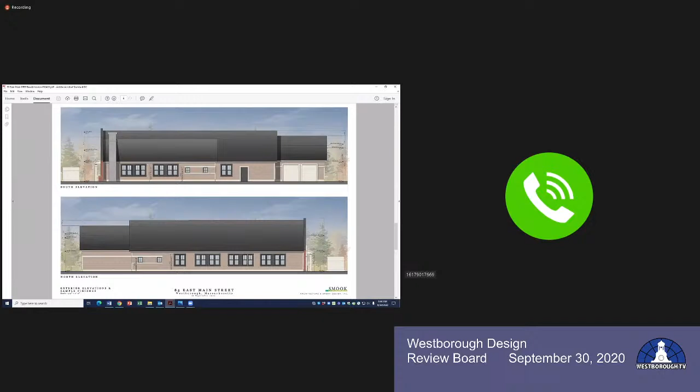And then finally, on the rear elevation, again, we've got those gabled vents that we were talking about. Lou, can you talk about what you ended up doing with that? Well, we used the trim material and painted it the trim color to make it look like what the louvers would have been. But similar to the front of the building where we didn't actually need them, we wanted to keep in line with the original design.

Right, and instead of literally tearing them out and swapping them, we've kind of created a faux louver look. One of the reasons we decided to do that in the back is, honestly, it saved some money. It looks fairly the same, let's just say that, and we felt pretty strongly in the front about doing it, but in the back we decided to do it to try to save a little money. I mean, we're talking thousands of dollars here.

To get that effect, and I think it was very successful. So, Clay, so in this elevation of the rear of the building, we're talking about those circular white vents. Is that correct, Lou? Because I don't have that image in front of me. That's right, yeah, it's the big circles in the gables. Okay, so what you're saying, are those louvered, or did you kind of take some AZEK and fake in louvers?

What's our expectation when we show up on site? It is not louvered. Okay, so it's just round and flat. Correct. And do we have that like 4-inch band of trim, if you will, around the white circle? We do, yep. In the last meeting, I think I had put up some actual pictures of them, but yes, it does have the band around it. It's a very similar look, it just doesn't have the louvered effect to it.

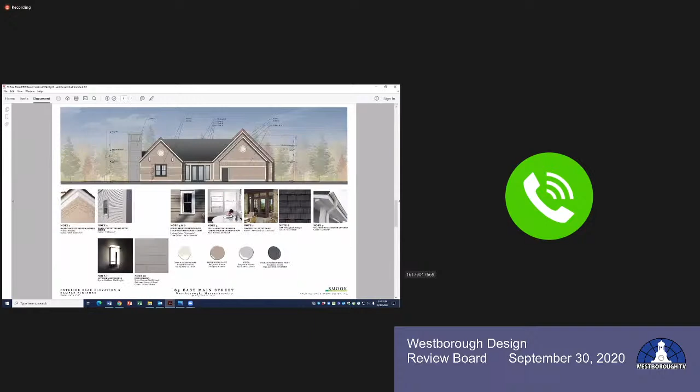So I'll speak. Go ahead. Clay and Lou, I assume that the drawings we were looking at today are dated September 2020, so all the updates you just described are in these drawings right here. And these are the drawings that Jim is going to use when he goes into the field with somebody else to give you the final sign off. So, although I can't see the notes about the louvers and stuff, I'm assuming that what you've said is what's been built and what's on these drawings, and when Jim goes to the field, assuming we approve everything, there'll be no problems. Yeah, exactly, it's noted on the drawings.

The images are correct. There's a companion document that gets stapled to that you probably have with you, a memorandum of the same date that walks you through it, sort of a supplement as a narrative. But yes, you are correct. Okay, and Hazel, does that answer your question? Yeah, except, Michael, Kristen, look at that first big picture that we have. No, it was a colored picture you had on that picture, that one is incorrect.

Lou, can you see that? Because I substituted the correct door in there on the front with a full glass door. This is the original perspective artist rendering of the building, dated November. Basically the title sheet where it's a 3D view. Yeah, we should just tear that off, because that's never going to be fixed.

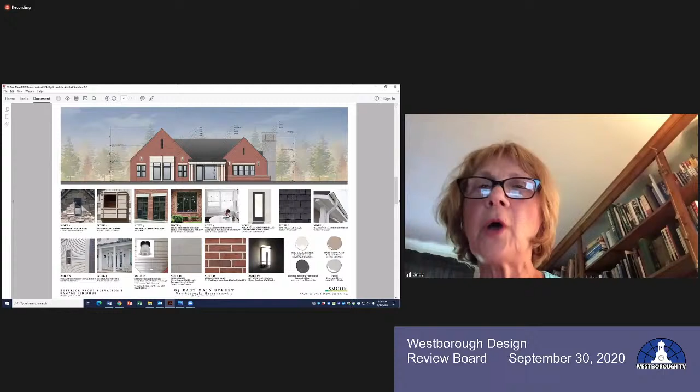I'd also like to say that on that sheet, there's a big sign in the front which I don't think we discussed with this board in terms of what signage this building will have. Yes. So that front rendering needs to be torn off, because it's architecturally inaccurate—just an early conceptual rendering that has nothing to do with reality. It just should not be there.

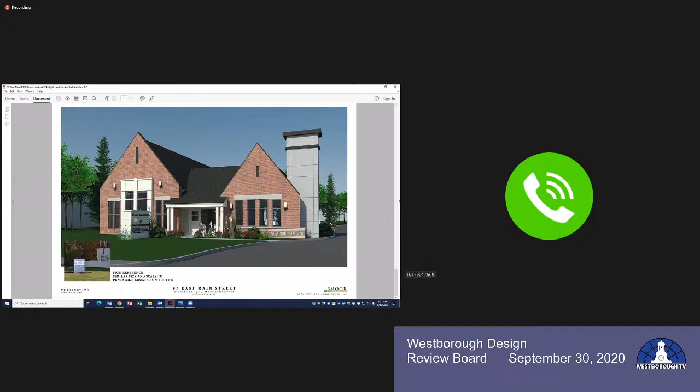I agree with you. You did not approve that. We have no intention of putting that in without approval. You're absolutely correct on that. So you'll come back to us for a sign, correct? Oh yeah, absolutely.

Okay, any other comments? No. All right, does somebody want to make a motion? I guess I'll make a motion.

I'll make a motion that we approve the modifications to the building at 85 East Main Street, per the notes made on these drawings dated September 24th, 2020. And what are we going to call these drawings? You guys have a name for these drawings? We'll just call them modifications to 85 East Main Street.

There are 1, 2, 3, 4, 5, 6—seven sheets. We're going to delete the last sheet, the perspective drawing. So we've got sheets 1 through 6, including the cover sheet, design review board.

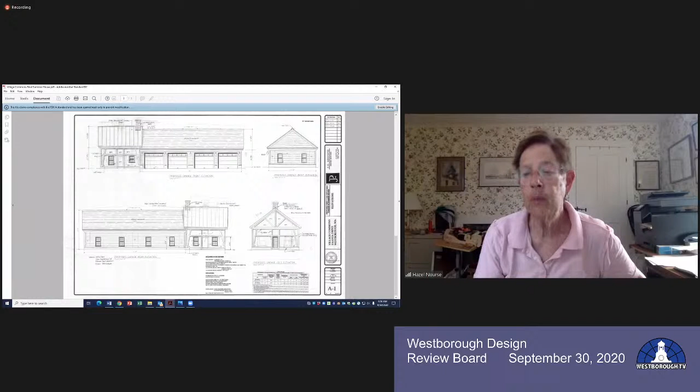Sorry, Michael, I just wanted to clarify that quickly. No worries. It appears to me the commercial building might be a faster discussion. Do we want to start with the commercial building? Sure.

Forgive me on what we approved or did not approve last time. I'm looking at the minutes from August 31st. So where we left off, we had approved the residential units, provided that when Jim did his on-site visit, it matched whatever the plans were that were provided.

So that's already approved, but we're just following up on those plans. And then we did not make part of the motion approving the commercial building plans, the summer house, or the landscaping package. But as far as we can tell, all of the items you had requested he update on these plans have been completed. So one of the things was making sure in the call-outs they designate the manufacturer and the color and those kinds of features.

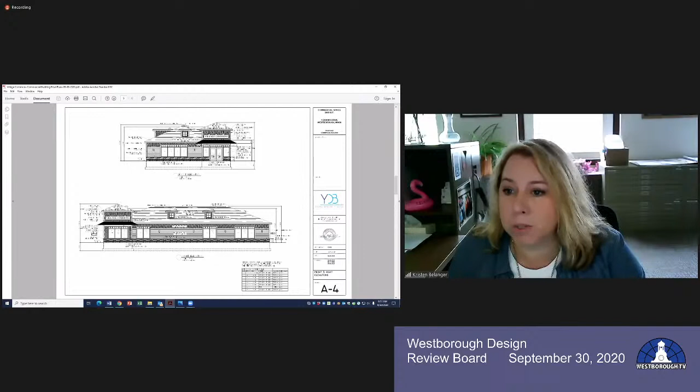As from what we can tell, everything is updated on these plans. I can blow them up if there's a specific area you want to look at today, just let me know. Kristen, could you zoom in on the front elevation, the top of this page? Just a little more so we can read the text.

All right, so what we've got is better call-outs on the materials being used. The siding, the Hardie board is called out. The AZEK 4-inch trim belt, corner boards, AZEK, the Hardie board. And then we've got the stone is somewhere in there. Fixed window. Metal roof is called out. Windows have ID numbers on them.

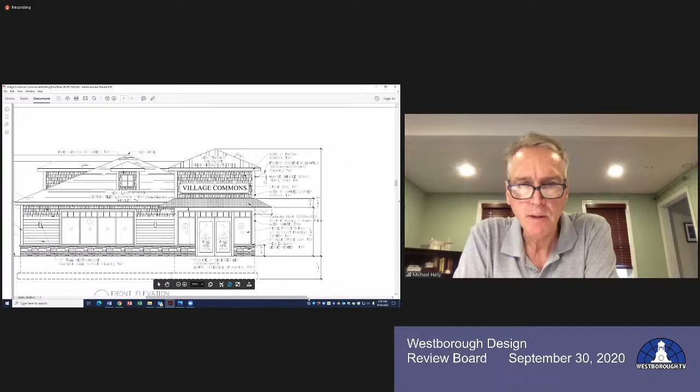Kristen, could you scroll to the right please? A little more please. Here you go. Okay, so we have the AZEK board. We have gooseneck lights called out. We've got the signage to be determined. And we've got this umbrella black called out, AZEK trim boards. And we've got the stone called out there. And I see call-outs on the doors and the flanking windows.

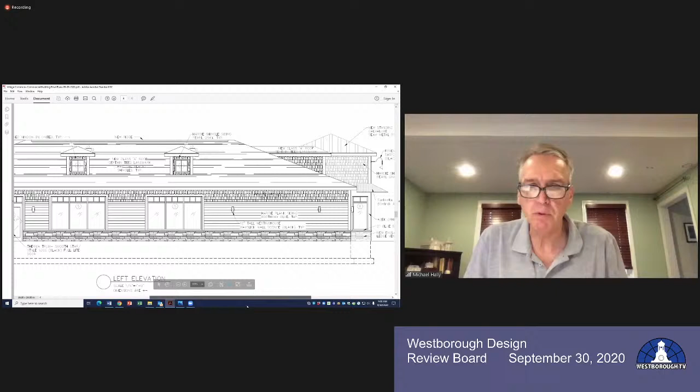All right, this looks pretty consistent all the way through, I imagine. And we've got the call-outs on the lights on the side, very good. Flashing, good. Got the roof called out, okay. Is the color of the light fixtures called out on that preceding elevation? Yes, black, good. And we have the 2-inch bluestone cap above the door, above the stone, I see, that's good.

Okay, and do we have cut sheets on all of our lights and windows? Yeah, I have a whole package full of all the specs for all the lights and the doors and the windows, everything.

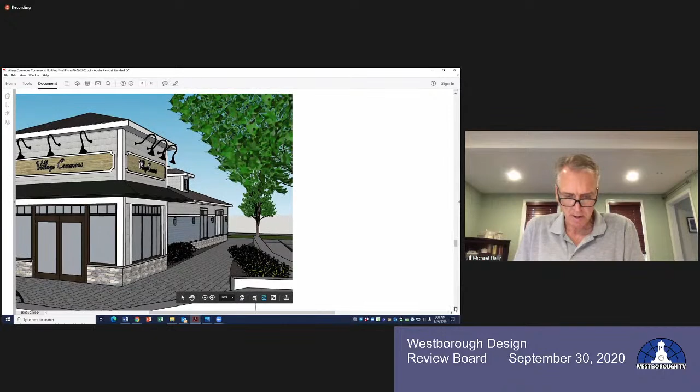All right, and there was a question on the minutes from August 31st about the building plan showing up with the turret on the commercial building, so there should be somewhere a plan view. I'm not sure if this was on the landscaping plan or in the architectural plans. Yeah, I think that was something Cindy had called out, and it was like the overhead view on the landscaping plan sheet.

Okay, so it hadn't been updated because they were focusing on the landscaping, not on the building, on that particular plan. Okay, it wasn't on this one, it was on that. Okay, and that's not part of these architectural drawings in this package we're going to approve, hopefully. Can you go to the plan view of this package, please?

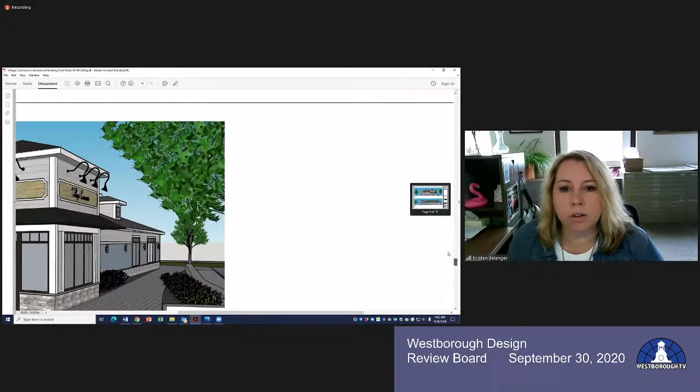What page would that be? This is all the renderings. There it is, can you zoom out? Hold on just a second. No worries.

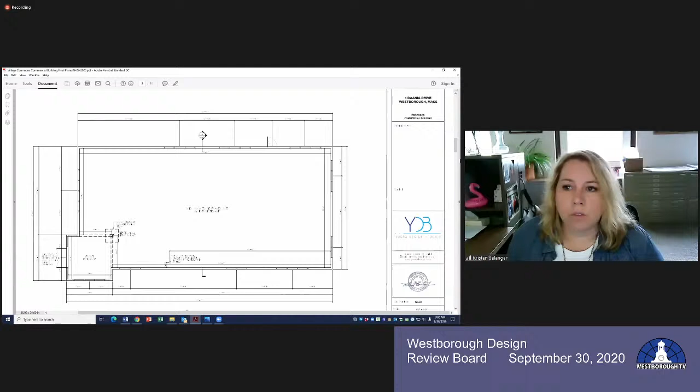Yeah, that's the foundation, so it should be one more up or one more down. Okay, there it is, is this it? Yep. Oh, okay, okay.

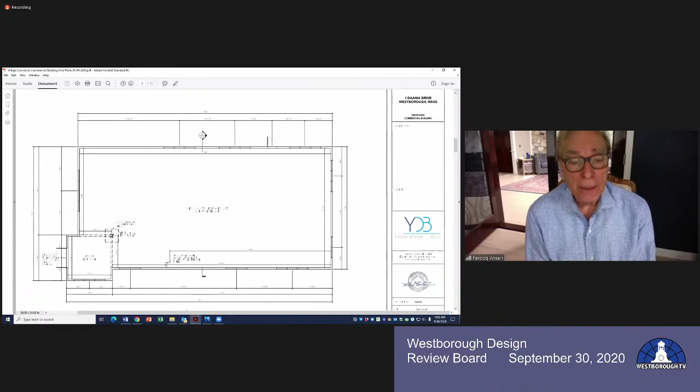Farooq, do you want to add anything before we open up for discussion? We can't hear you, Farooq. Okay, can you hear me now? We can, yes. Yes, I made sure that all the comments we were supposed to put on the plans have been taken care of, working back and forth with Kristen. And I think this plan is 100% complete to what you have requested.

Okay, Cindy, do you have comments? No, it looks like everything we discussed as far as I can see, I believe. Okay, Hazel, how about you?

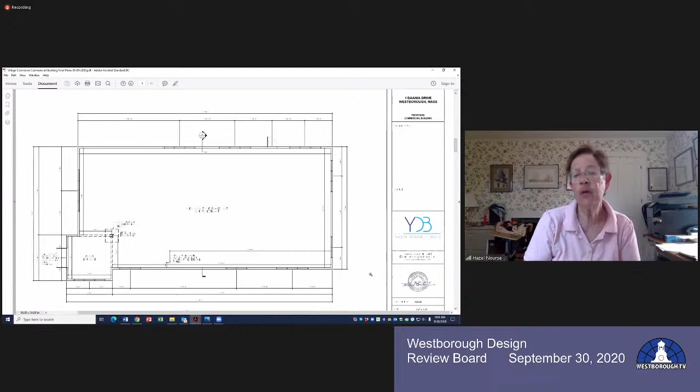Those architectural drawings that we have, do those conform to these, those 3D drawings? I believe they're part of the same drawing and the same file, so yes. Okay, just because this is where we've had problems where you had one picture of it and then the plans didn't conform to the picture. Yep, so Kristen, can you just scroll down to one of those 3D color drawings?

I think the color delineation seems right. The black on the windows, the stone location, there's a cap on the stone. The light fixtures are black as noted in the drawings.

Did you call out black standing seam metal roof on the tower there, Farooq? Yes. Okay, so again, we're approving the building in this review, and obviously the signage is not included in that. That's correct.

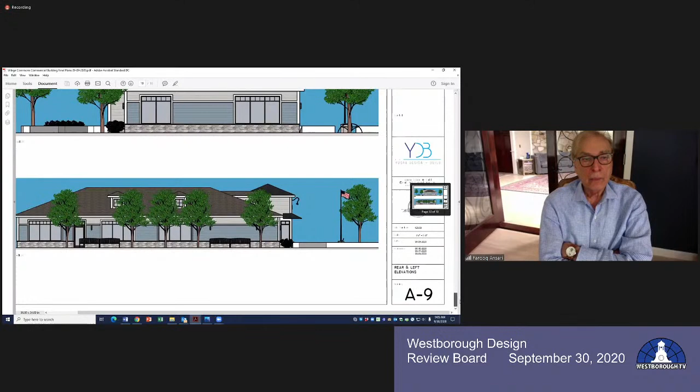All right, anybody want to make a motion or other comments? I move that we accept, that we approve the plans presented for the commercial space located at 1 Daania Drive, Westborough. Date of revision, I can't see the date.

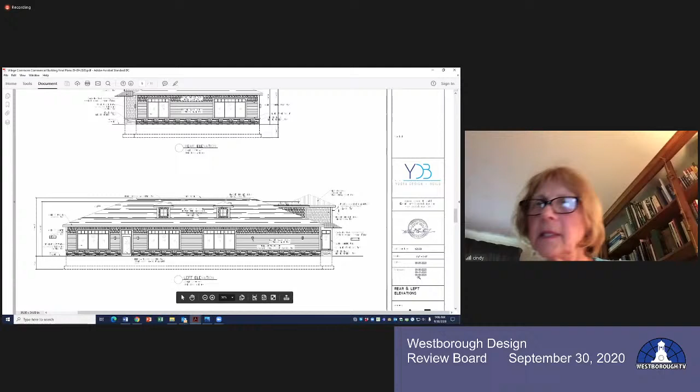Kristen, what is the date on these plans? Does that say 6? No. 9/9. 9/09/20. All right, made up of how many sheets? We've got sheets, looks like 6 before we get to these, so 10. Made up of approximately 10 sheets. I guess that's it.

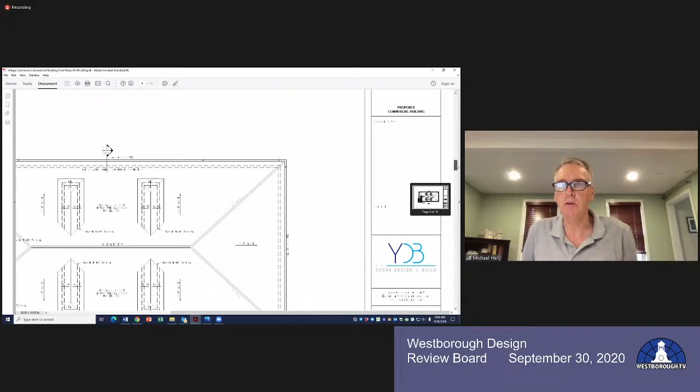Farouk, before we vote on this, I assume we're about to give you approval. At some point, Jim or someone from the design review is gonna show up and it's gotta look like this, right? Yes. Excellent, good. All right, I second the motion.

We'll take a roll. Cindy, are you in favor? Yes. Hazel? Yes to approve. Yep, yes to approve for myself. Thank you. All right, good job.

All right, so what do we want to talk about? The summer house next? Yes.

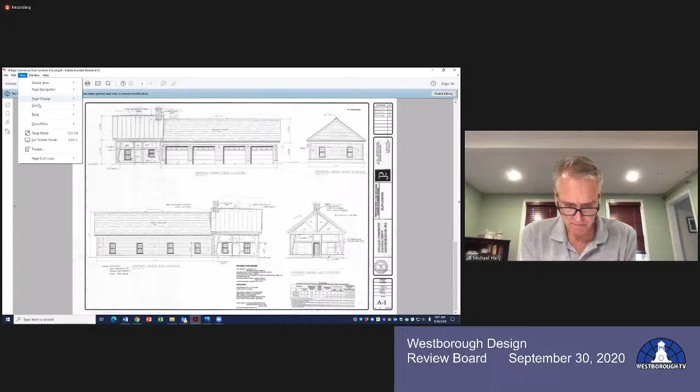Okay, all right. And I think we had questions on call-outs to make sure that the drawings were complete. So we have window spec sheets included with this package, Kristen?

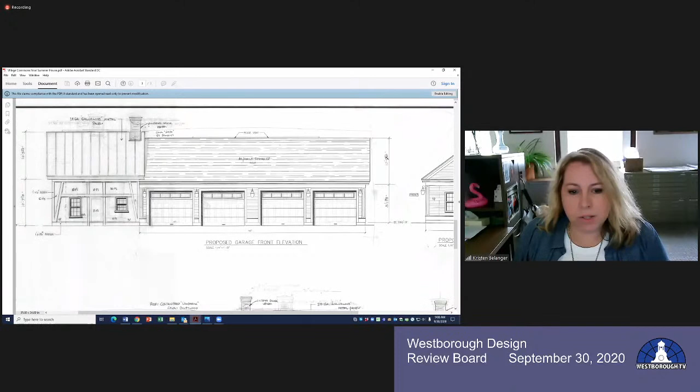That I don't know off the top of my head. Brooke, do you have window specs? Yes, I submitted that with them. It's the same windows, United, so. Okay, it's got to be 2 separate buildings, 2 separate approvals. Yes, but I submitted this separately. Okay, so there's a window spec specifically for the summer house. Right, okay, and they're United, the same, they're United windows.

Yeah, but it doesn't give a color. That's the color. Galvanized is the color. Okay, and I assume that's like a galvanized light gray, mottled gray? That's correct. Okay, I don't see any numbers on the windows. Numbers to correspond to a window schedule or a window cut sheet.

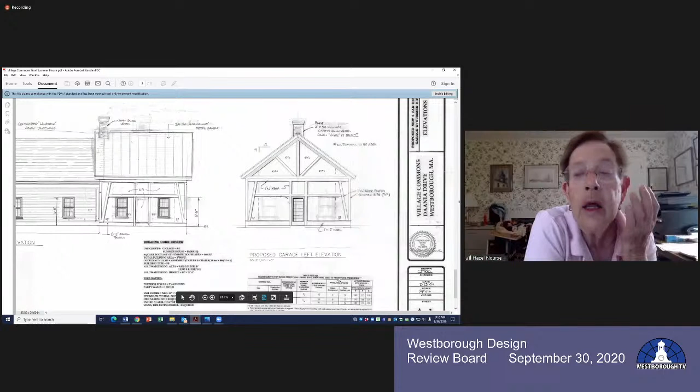Yeah, but it's not on the plans. No, this window here comes with the vinyl trim. We don't trim on the outside of the window, so there's no extra window trim on the outside of it. I'm looking at the windows, which are not designated, and also the colors. I have supplied that.

Can you scroll up and down a little bit? It just says United Windows. I've given a cut sheet with it too. Yeah, but it has to have a number on it, on the windows, like you do in the residential buildings. All windows have been numbered—that's a designation that they put on the window schedule. I don't think this guy put the numbers on the actual windows.

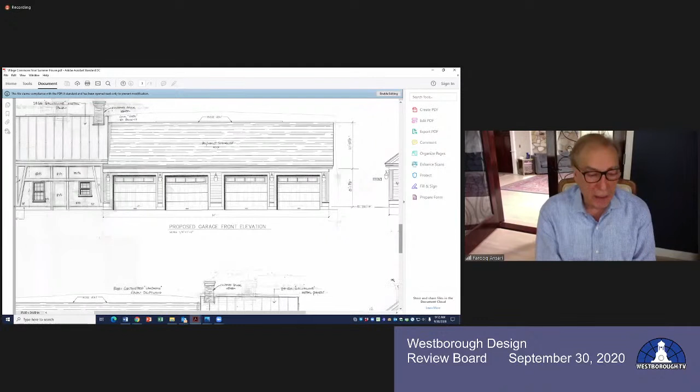This is a different architect—this particular architect didn't do that. But in the window schedule and the cut sheet, the window design and everything is there. I have it in my email, but there are two issues here. One, we need those colors on every plan to give you approval. But before we talk about that, let's talk about the color scheme and the textures.

So you can make those changes before we approve this drawing. So we've got that platinum stucco, yes, with the white timbering, and then we have that galvanized metal roof. And that brick is a red brick, I assume, on the chimney. Yes, it is. And the window trim is going to be white. What color is the existing garage siding?

Let me see. Can you go to herringbone? I think it is. And is that gray? Yeah, it is gray. It's the same—we've already built the garage, the first four garages we built are the same color, we're not changing anything. This was already approved, you know, so we're following that. It's right here, siding on the left-hand side bottom. It says Cedar Impressions, and the straight edge color is herringbone.

So this part is vinyl. Are you doing stucco panels, or is it a complete custom stucco finish on this? This will be stucco finished on the job. Okay, all right. So I guess maybe just at this moment react to the color scheme and the changes.

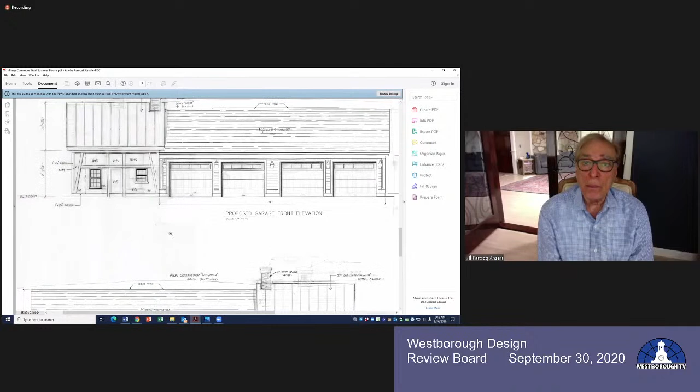I thought it was in this context. Yeah, I remember on that lap siding—I wanted the lap siding to be vinyl instead of HardiePlank, but obviously the board did not go along with that, so I stayed with the HardiePlank. But on this particular structure, you got approval on vinyl siding, is what you're saying, Farouk? That is correct. I don't remember that.

So let's get into the discussion about the finishes on this building. Farouk, is there a light at the front door? Yes, there is. Okay, and is that called out, is there a cut sheet? Yeah, I submitted that, it's the same. I got that too. I think three or four items are submitted along with the plan. I don't know, they're not showing here now.

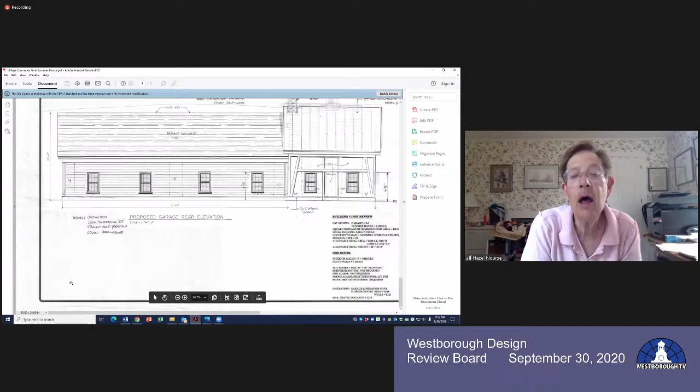Maybe Kristen didn't get it? Yeah, but what you have to understand is all of this has to be on the plans, I know, and it's not. I'm looking at my email right now that I had sent.

Michael, as far as the colors go, I am not enthusiastic about white on gray. I think it needs to be more, either a dark gray or even black. The thought of white on that, stylistically and architecturally, I don't think it's going to look well in comparison to the rest of the project.

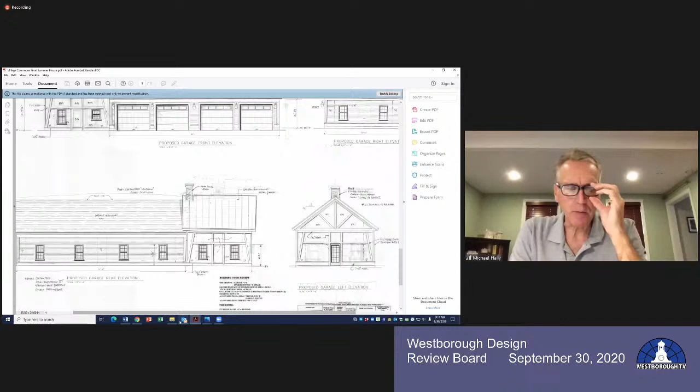Cindy, do you have a comment about the stucco color? The stucco color is platinum, a lightish gray, right? Kristen, can we go back to that? Which one is platinum, second row? Third row, second one down.

And that herringbone color, we don't have a sample of that anywhere. It's on the building. Right, but we're trying to consider this platinum color with that, in context. I just pulled up that email that has all the cut sheets on the window, the light, and everything right here. Yes, but what I'm saying is it has to be on the plans. It's not on the plan. It was part of the plan. I don't know where it went. It's not physically written on the plan.

You're going to have to, just like the commercial building, Farouk, go back and identify the light fixture, where it is, the color, and refer to a manufacturer and manufacturer's number. Same thing on the windows—we need the color and the manufacturer's name on the drawings. Eventually you're going to have to put in the stucco color, the Azek color. The roof color looks like it's there, and the brick color looks like it's there. But all that has to be right on every drawing, in addition to supplying the cut sheets.

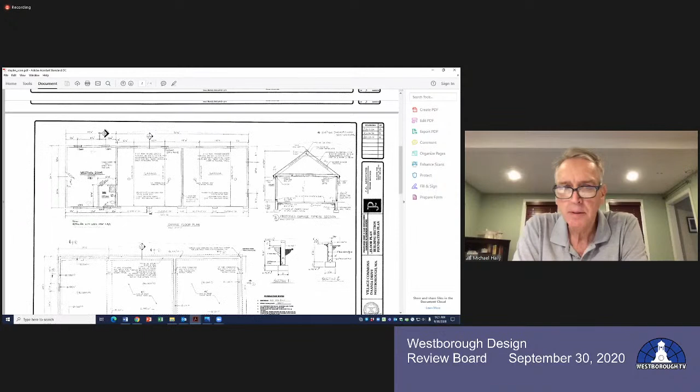So why don't we take it from the top? I don't see the windows. It's right here, go down. Yeah, right here—window, double hung. It says vinyl, double hung vinyl, white. It says right there. And then for the front door, on the right hand side, the lights are called out.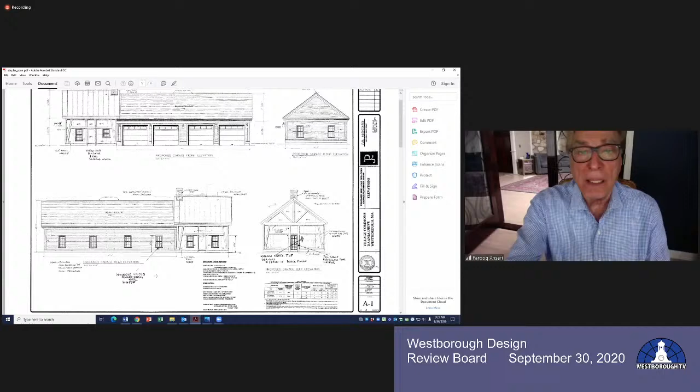No, that's the summer house. Well, it's pointing to the garage. But they're all the same—yeah, they're all the same, there's no difference. So for the exterior light, I've called out the model number, the make, black finish—I think we just got it mixed up. The other one was a previous light. It still has to point to the windows on the summer house. The garage is a different building—well, it's all one building, but I can have the arrow say that throughout, the same.

That's all that I have to say there.

If that's what you want, I can do that. But I thought I submitted everything very complete. Okay, Chris, so let's talk.

See, there it is. All the cut sheets were put together. That's part of the plan too. There's your front door. Okay, and what's that on the right? Is that a window? Yes, there's a cut sheet for the window. Okay, and that's from United and the others.

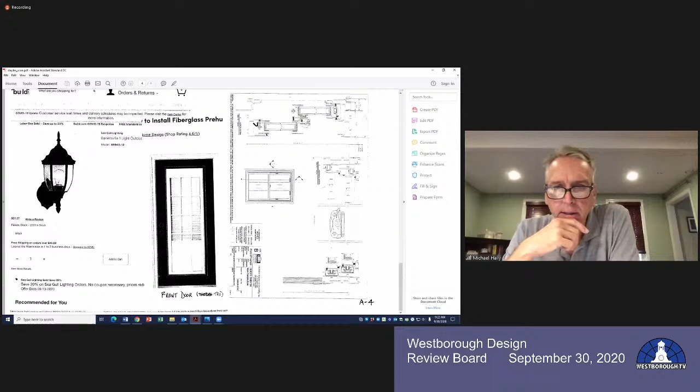Yes, I made sure everything was 100% included in there, colors and everything. Now, if she doesn't like the white color on the stucco or on the AZEK, that's pretty easy to change whatever color you want when we get to it.

So what we have here is the light fixture, the door, and the window spec. That's it you've supplied. You have a color. Currently we have a color, platinum. We have a color of the trim.

Kristen, Michael, I don't see the window. It's on the right-hand side. It's upside down or on its side, Hazel, that's why it looks strange. So they scanned it all together: a light spec, the window, and the doors in the middle, and the window is on its side. It's all been scanned into one sheet. This is sheet A4, it looks like. Yes, A4, it's numbered. Okay, so let's, if we can, Kristen, can you go to the first drawing?

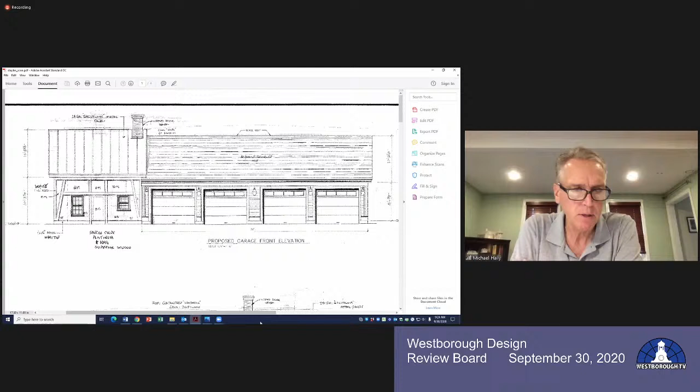Okay, let's zoom in on that top elevation there, please. Good. All right, so in terms of information, we have a color identified on the roof. We have a color identified on the brick chimney. We have a stucco color identified here. We have the AZEK identified as white, and all the sizes. Okay, all right, and Kristen, can you scroll down to the next elevation, please?

Okay, so here we have a window spec. It is pointing to the garage. It would be beneficial to have that also pointing to the windows on the summer house, and a note of some sort that all the windows are the same. I can put that down.

Okay, we have siding. That's the only thing that's missing. Michael, that window doesn't look like the window that was on the cut sheet. Is that because it doesn't have panes or anything? Does that make any difference? It will make a difference, and we've got it. Is that specific on the? We want a 6/6 grid window here. Right. So that's what I've ordered. All of them are 6/6.

So, okay, so that's got to be written someplace, either on this, single hung 6/6 vinyl window would be helpful on the identification. I thought the picture would depict that, but okay. And again, we've got the AZEK called out white. The stucco color isn't called out here. I guess that's... yeah, it is.

It's if you go down to the front elevation. Well, I know it's on. I'm saying on this specific elevation, but okay. They're all the same. Yeah. Okay, let's keep going, Kristen, I'm sorry.

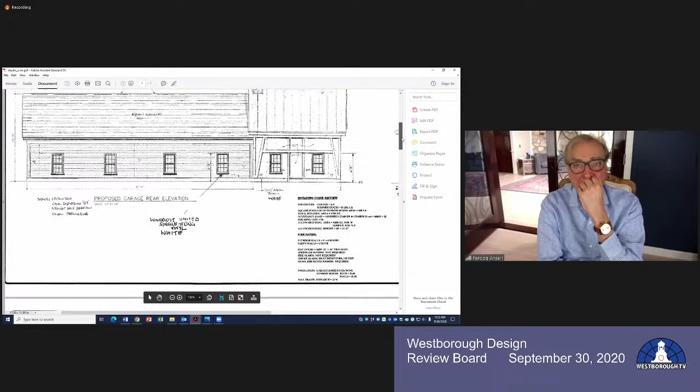All right, there we are, and there's our light fixture, and there's the full light fiberglass door, and we need a color on that door, Farooq. Yeah, full light, what color is it going to be? I think it's black finish. It says it black. Okay, doesn't say here, so. It shows in the picture. Yeah, black. Okay, all right, and so those are the three elevations.

It would be good on each elevation to indicate the stucco location and the stucco color. You have the location, but need the stucco color on each elevation, Farooq. And then we need a door color, and then that notation over the grids of the window, 6/6. So again, I guess I'm confident that with a few more tweaks, we would have information on these drawings that we would be able to approve, with those notes, once we agree upon a color scheme.

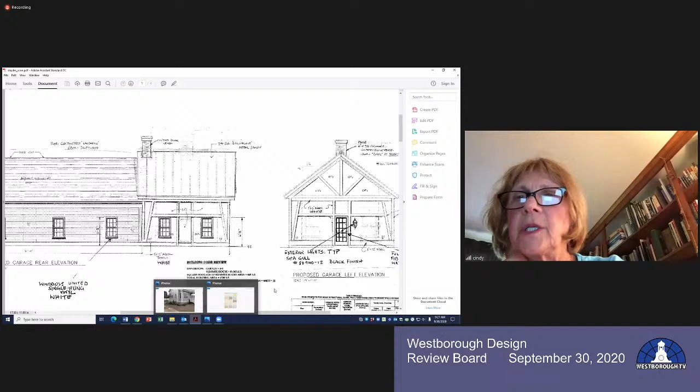Cindy, do you want to comment on colors or notes or anything? No, but could I just ask Kristen to go down one more slide? The one that shows the scanned sheet with the light fixture and the window. Was this it? Yeah, okay. Oh, so this, I just wanted to see what he put down for the windows on this one.

Yeah, that's not the 6/6, obviously. Well, it's hard to see. It's a cut sheet of a window. They don't put the grills in the cut sheet. If you look at them, they just give you the glass. But we have to ask for 6/6, which we did. It shows on the print. This is directly from United, so.

Yeah, it's hard to read that. I don't know if it indicates the grids on that cut sheet or not. Thank you, Cindy. Kristen.

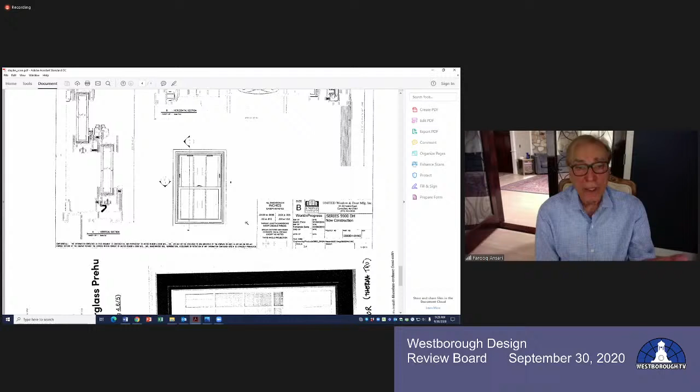They just show the glass, Mike. They don't show the grids because they come in 9 grids, 6 grids, 5, so we have to order one. I've put down 6/6. But you need to tell us your intention on the grids here. 6/6 - does it say it?

Yeah, but no, it shows in the picture. I know it shows it, but you need to call it out, Farooq. I can put that down on the front sheet. On the front elevations would be fine. That's fine. Okay, and then again, a color on the door.

The other thing too is the size of that. Cindy, I'm sorry, I hijacked your question. Oh no, that's okay. Yeah, I just wanted to take a look at that.

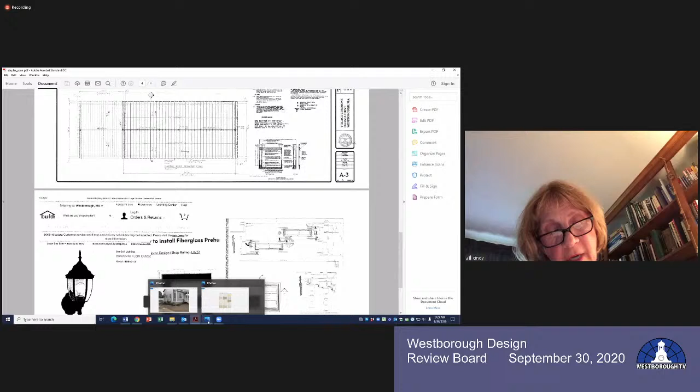And in terms of the color scheme, I'm not sure. Might be fine. I'm not sure how I feel about the white trim for timbering, but maybe we can take a look at that.

So, yeah, I'm sorry, Hazel, why don't you go? The door spec, do we need to designate the windows in it? He's got a picture that shows a door with all sorts of panels in it. And the door spec does not show that kind of a door, and there's no representation as to how many panels it has.

Yeah, that door is not like the door which is on the drawing. But this is just the cut sheet of that door. They come in very... but it's supposed to look like what you're presenting.

Farooq, you need to call out on the elevation whether it's a 15 light or a 12 light. It would be really beneficial if that's your intention, a 12 or 15 light, that it's clearly noted. If you go to the front elevation, I think I've shown that. But, I mean, if you can expand on that a little bit.

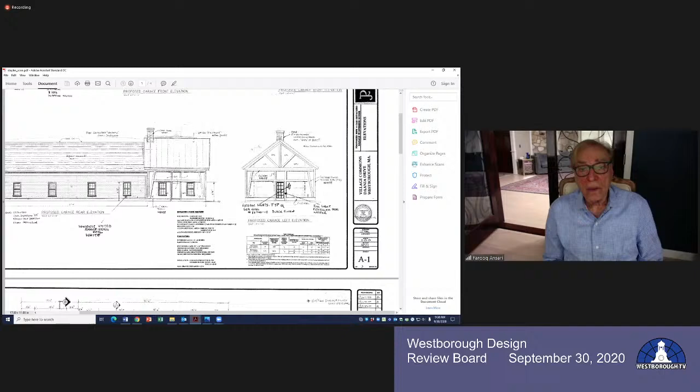It says... there it is. Yeah, it says full light, fiberglass, doorway. So exterior light, typical seagull. That's for the light picture. Sorry. So yeah, if you can write in on that - it looks like a 15 light fiberglass. Just write in 15, please.

And of course, a color. So, and then - I'm sorry, Hazel, you good after that? I'm done, I'm done. All right. And is there a size of the light fixture on that spec sheet? Sorry, Kristen. Yeah, there is a model number given, yes. And how big is it?

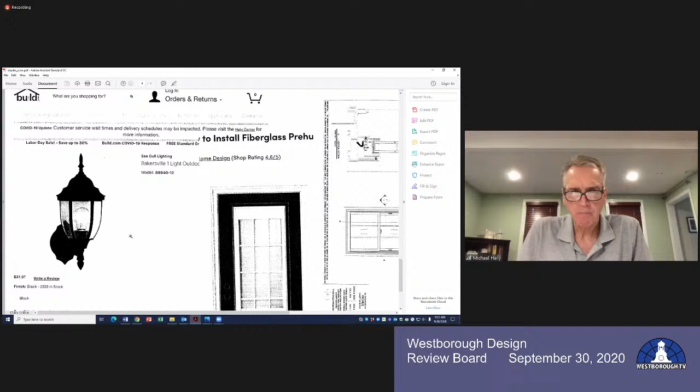It's - if you go to the cut sheet, it tells you. Yeah, I don't see a size on this. So we need a dimension on that, Farooq, and it would be helpful if it were somewhat close in scale on the elevation drawing. It very well may be, but if you could verify that, that would be helpful.

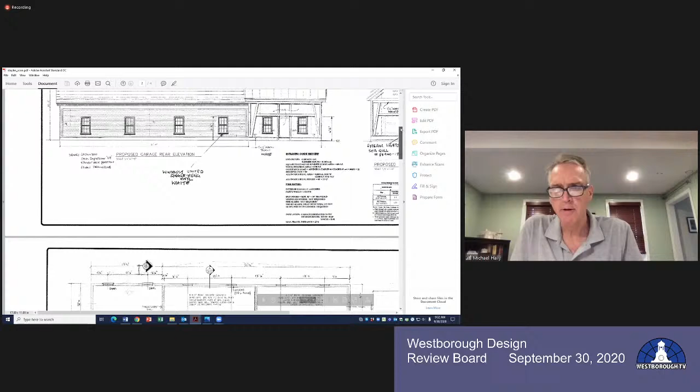Okay, all right. So I think we're close on the physical aspects of this project, but we certainly need more information on this drawing. And I know we're anxious about the color of the stucco. This is platinum, it's right here. I understand, yeah, but I guess what we're saying is we're not all convinced that we like it.

So, Farooq, is it possible that on site in the next few days you could get a sample of the platinum stucco, a color chart, and we could put it next to the door and a piece of AZEK? It'd be really nice to see, again, if you could get a sample of that roof color, because we've got two buildings coming together - it all needs to work, and if it doesn't work, it's going to be apparent from the get-go.

And we've spent so much time - this is a beautiful development here. I think we'd really like to see those color schemes. And in the spirit of getting you moving, the sooner you can get it in front of us, the sooner we can convene. You can make the changes to these drawings, and then we can approve this.

Yeah, is there any way through the chairman that you can conditionally approve this? I really got to move on these, and I've lost 4 months. No, we cannot. Like I said, if you get those samples there, I will get over there and see it. I'm sure - what samples are you requiring now? The stucco. Yeah.

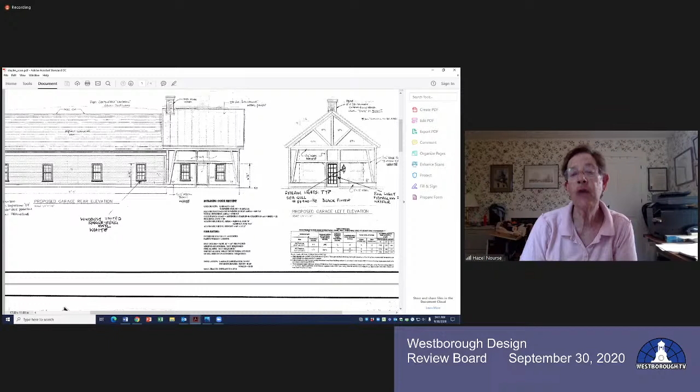Now wait, the thing I object to is the white on the timbers. I think that's going to look completely out of character. If you're doing something like that, I think you're better off taking the color of the stucco and making this a darker version on the same tone.

So you're saying, Michael, you're looking for contrast on the timbers, but you're not looking for white. I'm looking for a contrast that sort of matches the rest of the face of those buildings.

So if you took the taupe, then you'd do a darker taupe. Okay.

So we're going to live with the herringbone, whatever color that is, that's already there. Is that right? Right, that's correct. And we're assuming that's a warm gray. It is.

So at this moment, we've got that aluminum roof look, and we've got white, and then we're looking for the stucco. But as you said, Hazel, we don't have to paint the AZEK white.

Right, typically this is, half-timbering I guess is the architectural term. So all those crossbars, all the timbers, would be real wood. And then, again, in a lot of cases, the stucco is white or a lighter color.

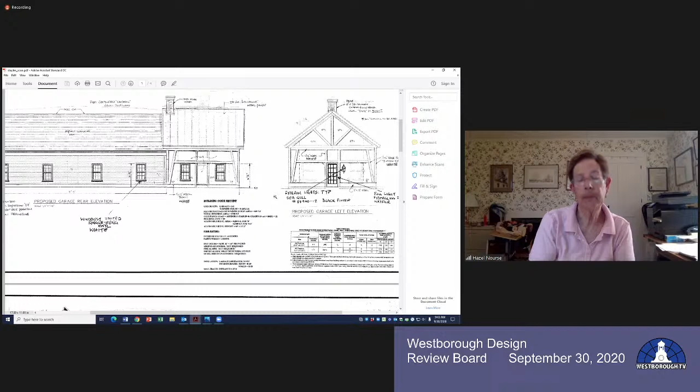So you will specify the color when we meet on site? Well, so again, right now we're questioning whether we should reverse it and paint the AZEK a darker color like amber or taupe, and then look at a whitish or lighter stucco color. That's fine.

Is there someone working with you on this building? Do you have an architect on this? Yeah, there is, but he doesn't get involved in the colors or anything like that. I'll be more than happy to do whatever color you want. I mean, there are hundreds of colors. You can choose and just let me know, and we'll paint that.

Sure, I just want to simplify this and move on. I understand. Would you like to, can I present you with an option though? Let me finish this, and when it's all done, we'll have it stucco with white because it only comes in white, and then you tell me the color you want on it, and I'll paint that. So do you have someone that could add some color to the stucco?

To these elevations? No, I would have to be the one to do it. Otherwise it's going to become a runaway thing. I'll do it, whatever color you want. I'll have the samples for you when you come to visit. And then if you want to decide to go with any other color for the beams, just let me know.

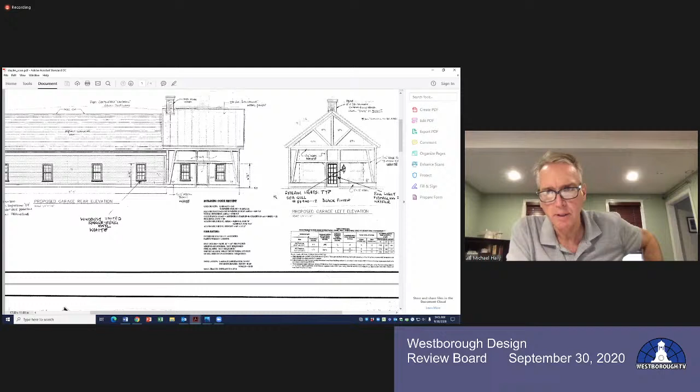Hazel, what could, again, if we have all the materials, the colors on site, maybe we can interpolate how it would look with the beams, the timbers being a color versus white, and reversing the current plan, so we have darker timbers and lighter stucco. I think that's a possibility.

Okay, so why don't we get the materials on site, and we'll be able to see the stucco colors in comparison to the existing garage, and then come up with a game plan on color. Okay, I'll call Kristen to let her know as soon as I can get it assembled together so you guys can come and look at it.

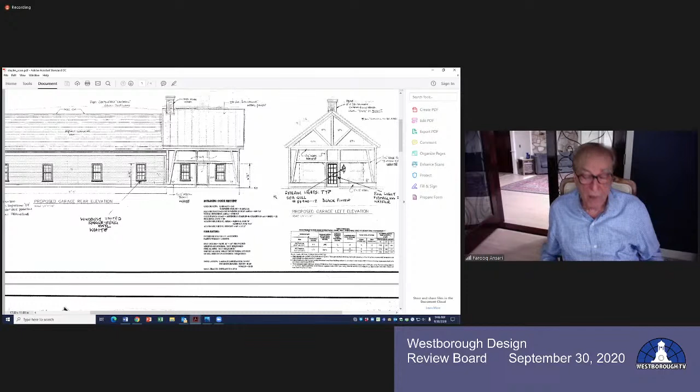In the meantime, can I request the board to at least allow the building permit to be given for the foundation? I mean, it's getting us into trouble time and time again, Farooq. Just get us the colors, let's make some decisions and get you approval on the full project. Right, okay, piecemeal is a problem. Okay? All right, I'll do that ASAP. Good, excellent. All right, next.

We've got the landscape. Landscape, okay. I submitted to Jim and, go ahead. No, not that, I think it's separate plans, A, B, and C. Okay, is this the landscaping on the commercial, the residential? No, there was just one of the sheets from the whole set. I think I submitted separate plans for A, B, and C that Jim said he's fine with it, and we started planting, but obviously we need your okay on it.

You will note that Jim looked at these, and I had also seen them, that the plantings that have been done are dying already because they haven't been taken care of. We take care of it every day, Hazel. Every day it gets watered, look at it. That's all watered. I sent an email to Jim to prove that. I mean, I spent a lot of money on those plants, I'm not going to let them die. All right, just saying, I have pictures from Jim that show they're not being taken care of. So anyway, I just wanted to point out to the board, this is something we've got to make sure gets done.

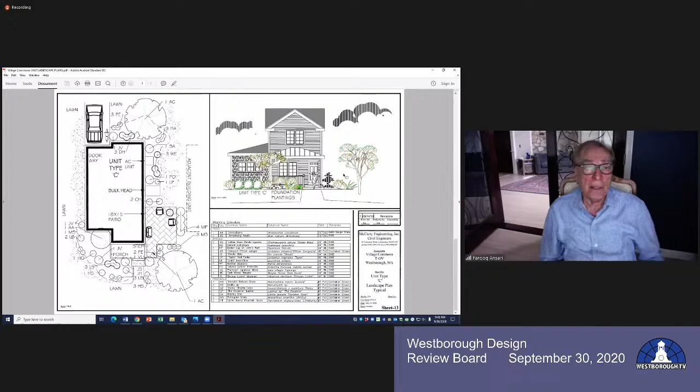That's A, I think. Yeah, okay, so that's B. And that's C. And how have these changed from the last? Well, this was done in consultation with Jim. He came, he reviewed it, he walked through with what was there, and I had my landscape architect redo them, and he was satisfied, and he wrote me an email that, yeah, just go ahead, but plant it this month. This is the best time to be planting, and we have a whole bunch of plants in already.

So, yeah, I have Jim's email to you, September 24th, last Thursday, I think. And he makes a note here, the landscape plans as revised are acceptable. Correct. And you got to obviously make sure we follow these plans for when he comes to inspect the site for approval. And to Hazel's point, he's noted that the plants are stressed, obviously it has been a pretty dry summer. And mulching, watered, yeah, it's all done, mulching and what have you, so.

Okay, anybody have any comments on the landscaping for the residential units A, B, and C? My only comment, which is to follow up on our email that we received from Jim, was that the landscaping must be completed prior to the unit occupancy.

I can't do that in the wintertime. Well, then put everything in the fall. No, but the house is going to get occupied in February and March, and I cannot do the landscaping then. So all the other houses that I built here, they allow me to do the landscaping when the time is right. So I cannot complete that. I cannot plant grass in January.

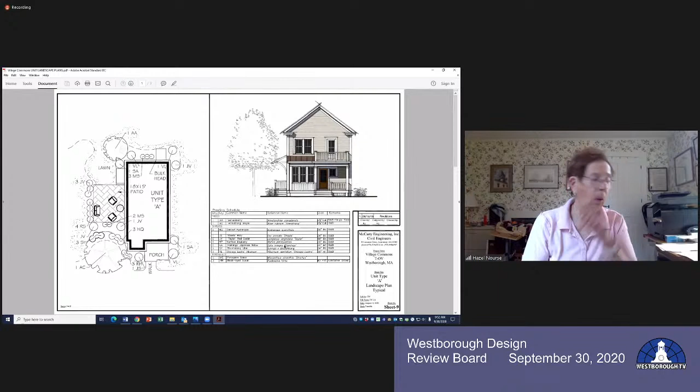And we have a large bond to cover that. How do you feel, Hazel? I am, I mean, if he says he's got 3 more that are proposed to be occupied the next week or next month, I'm more inclined to do the approvals individually, piecemeal, because I find that otherwise things don't get done.

Okay, I have done everything there, Hazel. I mean, if you go look at it right now, they're done. Yeah, I've been out there about 25 times. I mean, as I said, I'm tired of this. And it just, every time you come, there seem to be things that are not quite complete. So I would be more inclined to approve.

You say you've got a certain number of units you're looking for approval on, I assume, so that you can get your certificate of occupancy. I'm willing to do whatever, those that are coming up. You said you're not going to be working on the rest until the winter anyway. No, I'll be building right through. I'm building right now, so they get completed as they go. All I'm saying is nobody expects landscaping completed for the units that close in the wintertime. I cannot shut down the project for 6 months because the grass is not there, I understand that.

I'm not raising them. I mean, you'll see though, Hazel. I mean, go look at it, they're complete, believe me. I cannot do... see, these units are so close to each other, unless both the units are done, we cannot do the landscaping in the middle. So now we got these units done, and we finish the landscaping. As we go, we'll do the same exact thing. I don't think you need to worry about the landscaping at all. So, I mean, the customers won't accept the house unless I finish them. And I have a bond to cover it.

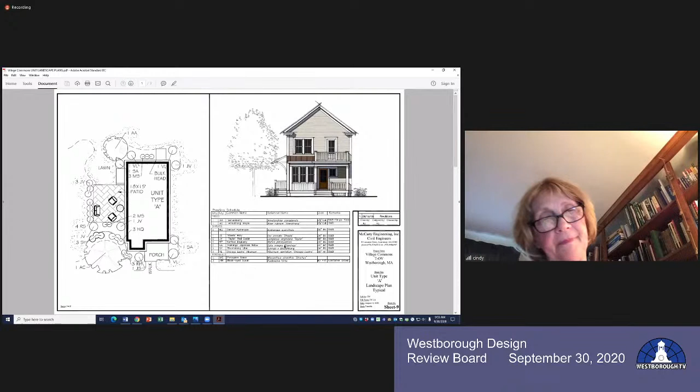Cindy, do you have any questions, concerns? No, not at this time. So Hazel, we could probably add in something about landscaping must be installed and maintained in a timely manner in response to weather conditions and timing. I don't know how to make a hard and fast rule. Right, no, I can understand that, Michael. I agree with you.

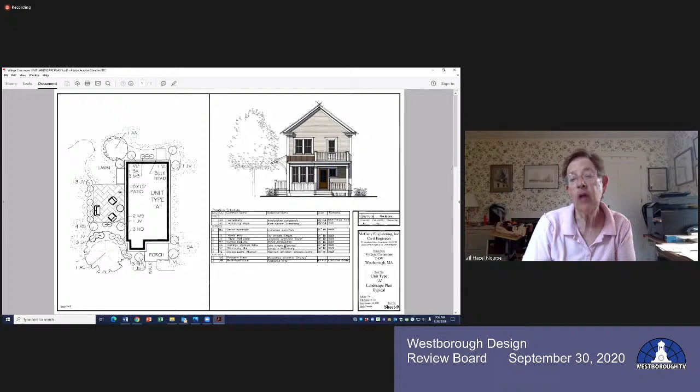The building department controls the landscaping part, but they will not allow anything unless it's weather pending. Actually, the building department generally doesn't deal with landscaping, but anyway, I will go ahead and approve based on the fact that landscaping is installed prior to our final sign off on the project, because I know there are significant trees that were removed that he's supposed to put back in. So there are a lot of pieces of landscaping that need to be addressed. Exactly, I agree with you.

Okay, so why don't I make a motion that we approve these three landscaping plans. Kristen, I'm sorry, I can't see the sheet numbers and names of these for units A, B, and C. I think there's sheets 9, 10, and 11. Is that accurate? Yeah, that's 9... that's 11, and that's 13. So 9, 11, and 13, as proposed in these drawings, and the date is August 14th, 2020.

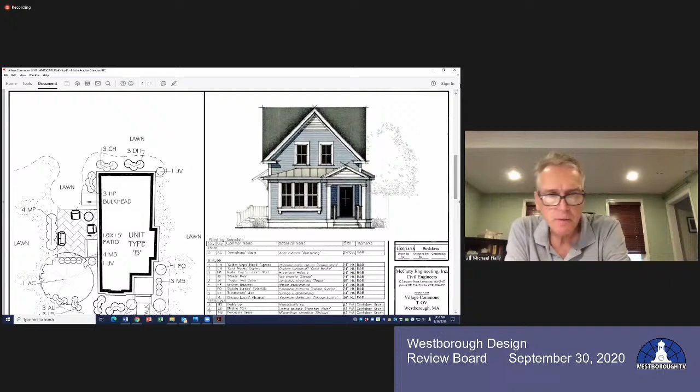September. I don't see a revision date. Up top? Up there it is. Sorry Kristen, I can't see it with the Brady Bunch in the way. Yeah, it's 9/14. Okay. And all landscaping work is to be completed in a timely manner, as close to prior to certificate of occupancy, with regard to climate and weather conditions or seasonal factors.

Michael, yeah, it says 9/14/18. Yeah, that's a typo, it should be 20. He just gave it to me the other day. Yeah, I'll get that corrected. Okay, can you resubmit it with today's date? Yes.

Okay, so new plans to be dated September 30th, 2020, right. I'll have it out to her today, to replace these plans dated... I think the latest date on that was August 14th or something this year. Is that, I can't see. Again, that all landscaping is to be completed in a timely manner, subject to weather and seasonal conditions.

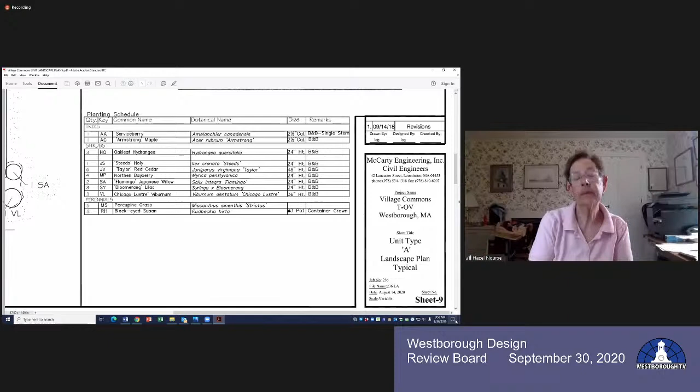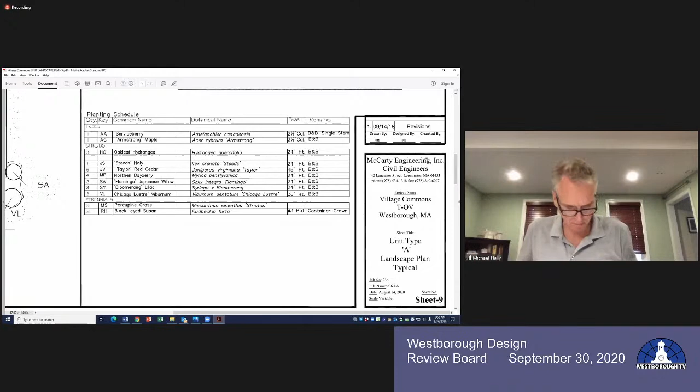Second. Second. Cindy, you approve? Yes. Hazel approves? Yes. I approve. Thank you. You're welcome, I'll send in those sheets to Kristen today with a new date. Great, all right. And I'll call you and let you know as soon as I have the samples so you can get that out of the way too. Good, okay, so units A, B, and C.

May I just ask another question regarding landscaping? So we've just approved the landscaping right around the particular residential units A, B, and C. Right. But he has submitted sheets that show it in the whole development along the perimeter and so forth. Are we going to discuss that also, or handle it separately? That would be separate. Buildings such as the commercial building, the summer house landscaping, all of that is under another approval process. Okay, yep.

Kristen, if you could, I think you have a list of the samples that we've requested. Could you just confirm that by email? Sure, to Farooq and maybe send us a copy. Yeah, thank you. Michael, if there's anything that was left out, you can see from that. Yep, okay, okay, awesome, thank you.

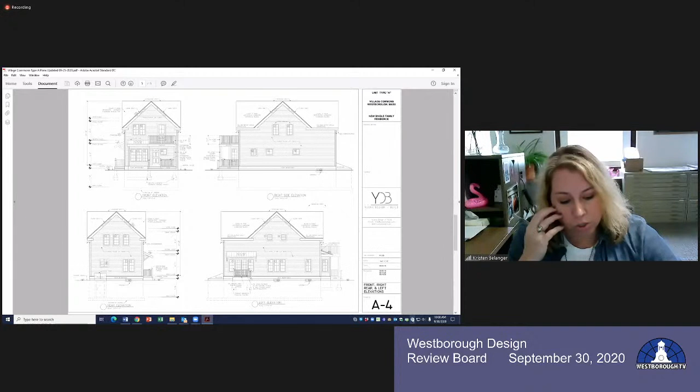One thing just to note, I don't know if you want to do it this way, but we got a master landscaping plan. It was a file of 15 sheets that included all of the landscaping. In addition, it broke out these individual types - type A landscaping, type B, type C - with all the different specs for the different materials and plants. Technically, we could approve that entire 15 sheet master landscaping plan if you want to do it that way.

I don't. Okay, Cindy? I certainly don't. Okay, so we just need to make a note to go back and approve the remainder of those sheets in that master plan. Farooq, I assume at some point you'll give us a final landscaping plan on the commercial building and the summer house. Yes, I would, but I would pretty much stay with what was previously approved and have your reapproval if that's what you want. All right, well however you want to approach it, we do want to see those revised landscaping plans. Okay, thank you.

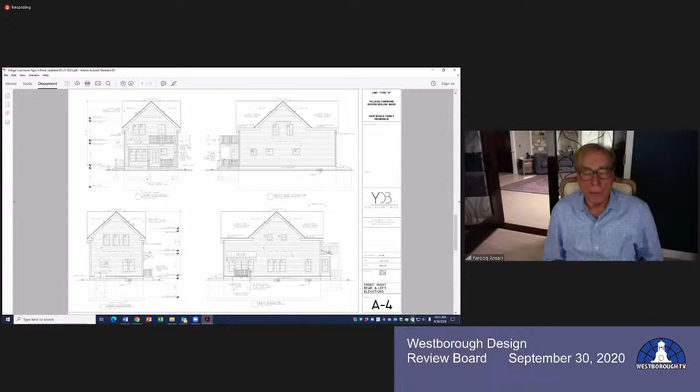All right, so I know Jim was out looking at residential units A, B, and C. Yep. He made some observations in the field, and they're also reflected in his email to me, you, and Farooq. Yes, he took care of it. Okay. So these plans that Kristen has on the screen are the updated plans, and what's the date on these drawings?

9/19, 2020. So when were these updated, Farooq? After Jim went out to the site and he called me, that was about a week, 10 days ago. He gave me the details of what needed to be done, so I did that. Then he emailed me a couple more things he wanted on the plan, so I got that done too.

Okay, so his email is dated the 24th. These plans, where he may not have changed the revision date, were updated after his last email. So if I look at Jim's notes on unit type A, it says revised 9/19.

So the right side elevation, second floor windows, 2 appear to be fixed. The plan shows them as double hung. They're fixed. Okay, so if we were on site right now, this is what it looks like in the field. That is correct. So those are 2 fixed windows, 8 light windows, and that's what it looks like.

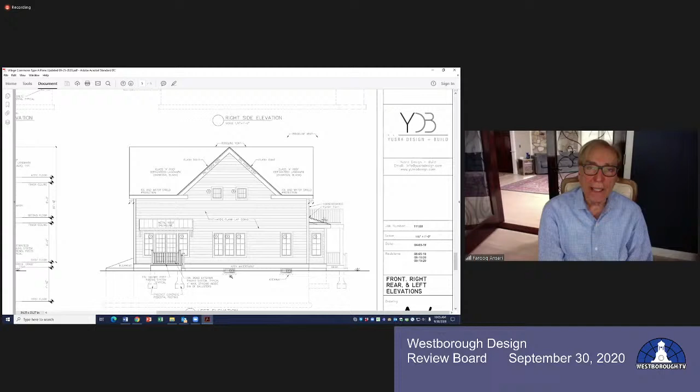Those are larger than what is shown on the plan. I think he's changed the numbers to reflect what they're supposed to be. Maybe if we go and look, but they were incorrect originally on the plan because they were a different size. That is correct, I fixed that. So the drawing doesn't reflect the size, actually. No, this particular plan reflects the size of the windows used in the field.

Okay, well, let's look. Look at the schedule and you'll see it.

So in light of Hazel having to go - Hazel, could we approve Unit C? There don't seem to be any comments on Unit C from Jim's notes in the field. Yeah, Unit C is fine. And I checked B, B looks all right. I did not see A.

So I looked at B and the changes were made on the plans according to the letter we got from Jim, the list of changes he had sent to Farooq. B and C were correct. A was the only one I did not have a chance to look at, and it never came through on my Dropbox yesterday. So whether the changes were made pursuant to Jim's comments, I am willing to approve those based on the fact that the plans reflect any changes requested by Jim from his field visit.

Okay, so do you have time for us to make a motion and approve B and C? Hazel, you have time? Okay.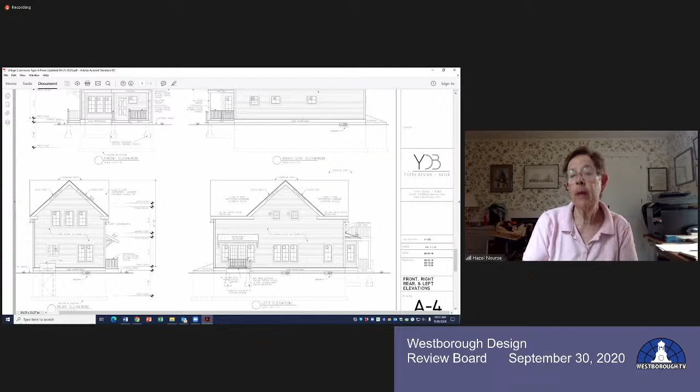I would approve it as long as it conforms to, and the changes were made conformed to, what Jim asked to be changed. Yeah, I did do that, yes. Okay, and I'm willing to do that.

The only thing I'll say is those windows, those 4 over 4 windows, A4 on that left elevation, just don't look right to me. Again, I haven't been there, but if we approve this, Farouk, they've got to look like that. So when Jim shows up, they all have to look just like that. Yes, okay.

All right, so I will make a motion that we approve residential units A, B, and C, drawing numbers A3, A4, A5. Kristen, no? What do we got?

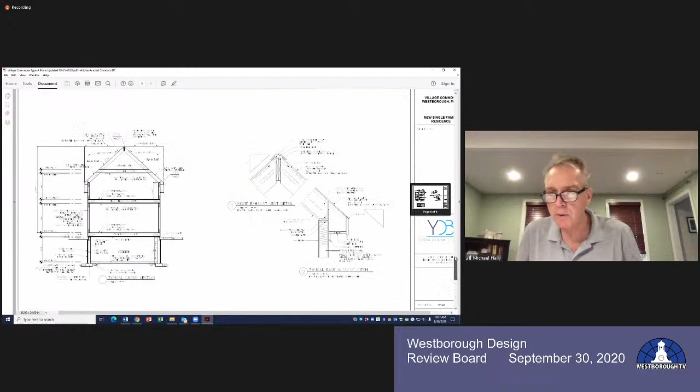Can you hear me? Am I still on? Yes, I can hear. Okay.

So there are 3 separate files. The ones we're looking at right now are just A, and those are sheets A1 to A5. Then B is the same thing, A1 to A5, same dates, but unit type B is in the title.

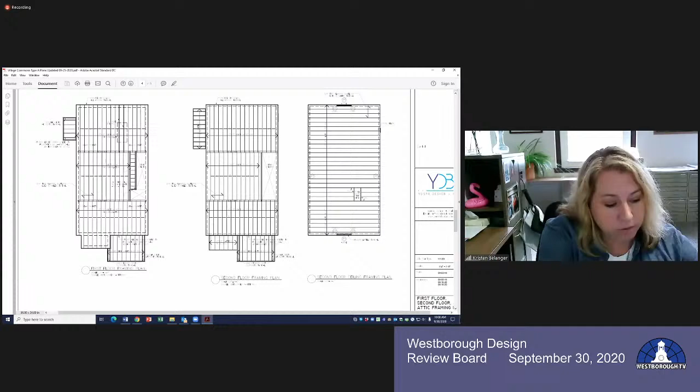Kristen, did you compare the comments made for Jim on A and whether those changes were made? Yes, it was the two windows that we just highlighted. They were double hung on the original plans. He changed them to say fixed.

And what about the size, the panes? Yep, and that's what Jim's note said, that 4x4 were installed on site. And the original plans we had showed 2/2. Okay, so those changes were both made according to his notes.

Okay, so we have just two different sets of plans, same dates. The only difference is up at the top, this title right here, unit type A or type B for the title. Okay, so again, I'll make a motion that we approve the sets, type A, sheets A1 through A5.

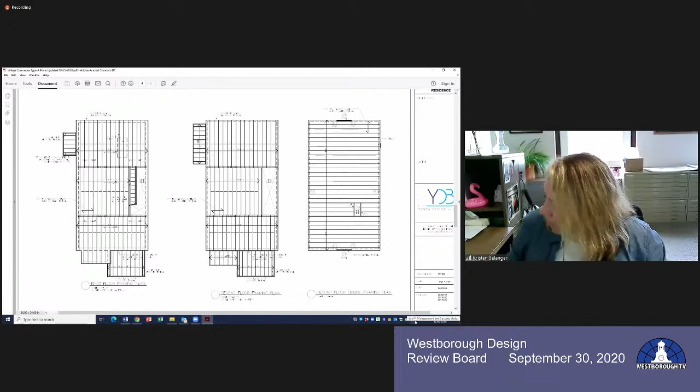And the name of the drawings are, Kristen? Yep, that's right, A1 to A5. And then the date is the 19th. 9/19. Do you have to say the revision dates as well? I don't believe so. The latest revision date is what we're looking for.

And then same with unit B, sheets A1 through A5, refer to the appropriate numbers. And then same for unit C, assuming the same numbers are A1 through A5. Yep, okay.

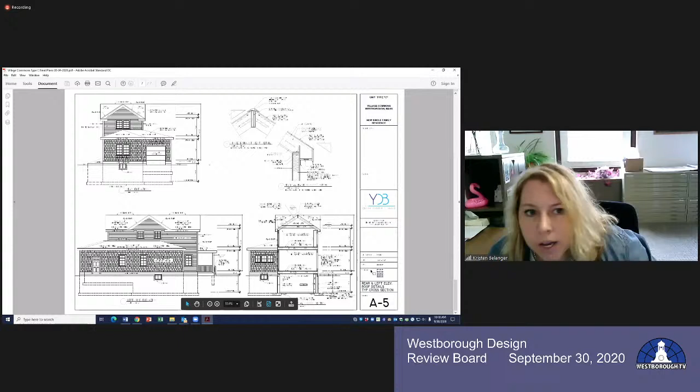So upon inspection, all of these buildings, right Farouk, are going to match these drawings? Yes. Actually, one note, it looks like on these type C plans, since they haven't made any changes to those recently, the date on this one is August 4th.

Right, August 4th. Did he put the railing in? Because if he did, that was after that date, so there should have been a revision date. I'm sorry, the revision date, is that C we're looking at? Yes.

Okay, would you go to the other side, or bring it up, because when I reviewed the plans originally they were not correct - I need the other side of the building. There it is, I need the right elevation. Well, you see it in the front also. There it is, yep, it's in both. That is missing the railing.

So it's on the column side, Hazel? No, there are two railings there - one on the column side and one on the house side. There are two separate railings on that house. If you go down a little bit, there is a separate railing.

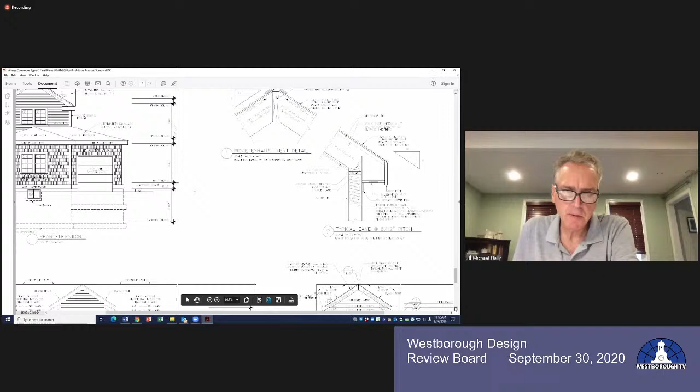But Farouk, in this elevation, at the corner board, we should see the other railing. I'm not sure if this is the most recent one. It's there, can it go down a little bit? And I think - is it in the plan view? Yeah, I think so. I know we had discussed it many, many times.

Well, one thing we didn't discuss - that was a discrepancy. I don't think the board ever said you had to install railings on both sides of those steps coming down. It was only supposed to be on the right side. But when Hazel went out on site, she noticed it was on both sides. So that is a change on site that isn't reflected in this plan. It's not required by building to have railings on both sides, so that's not something they're really looking for. Okay, but we did discuss that.

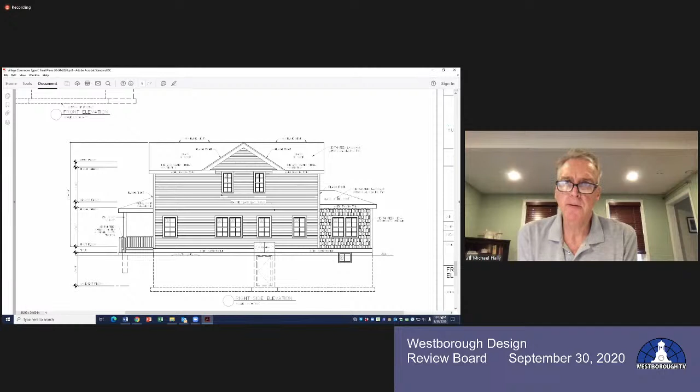Okay, so why don't we make an amendment that we are asking for 2 posts and 2 railings from the porch to the patio access on unit C. Can you go down one more? Yeah.

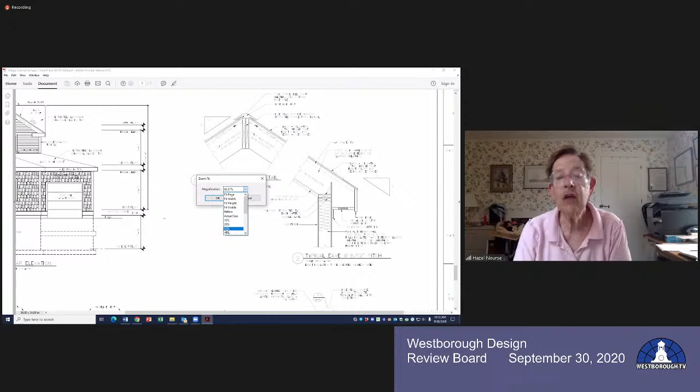It's not on here. This is the plan - he thought he should put it in. It had to be there. It needs to be on that plan, on that elevation. Right, I'm just trying to - I told you that. I told your guy in the field, it was written down on the list that was given to you, and so you should have revised it. I thought he did, that's what I'm trying to look at.

I'll have to look at my email. I have a feeling I have a plan that does show that, but anyway, I'll look at it. And I have looked, not at that - the plan hasn't been revised the way it's supposed to be revised.

The other thing, Michael, if you want to look - why don't we do A and B? If you look on the plans on the other units, the windows down here, the windows and access to the basement, you'll note are different sizes on the other plans. I noticed that, yeah. And in the original plans, you see how small they are? Yeah.

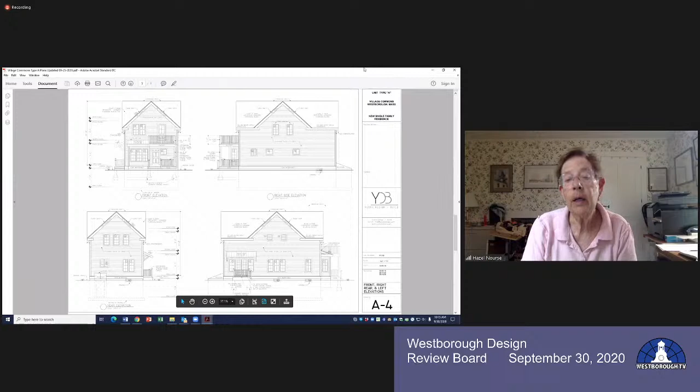And so that is something that should be corrected. I'm willing to approve this if we get the corrections and they look the way they're supposed to. I mean, too many times I've been back and forth on this. As I said, I did give a list. I went through this railing more than once, and I'm still a little concerned about the size of these windows, which are incorrectly shown. You mean the basement window? Yeah.

So do we want to approve A and B? Hazel, are we good with A and B? We can go with A and B as long as we confirm about the basement windows. I'm not too hung up on the basement windows. Through the chairman, I had sent... Farouk, hold on, Farouk, hold on. So I don't think there's going to be a change in those basement windows. Again, I understand your concern for consistency and communication, but I'm not too worried about the basement windows.

Okay, they have to conform to building code for natural ventilation, and they're essentially below ground. So, yeah, I don't know. Well, they're actually part... all right.

I will approve those, and I'll approve C based on the fact that the changes are made so that the plans are correct. Okay, so we're asking him, we're going to give him approval on all units, but C, hold on, Farouk, C unit, we're going to want a revised drawing showing that second newel post and railing on the stairs down to the patio. Is that correct? Yes. Okay. All right, Kristen, you got all that?

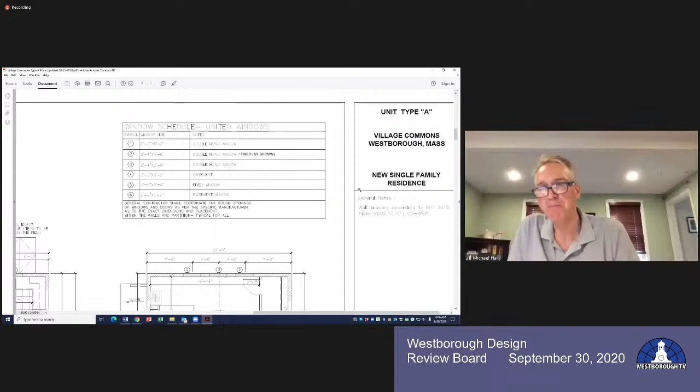Farouk, go ahead. I just sent her the email of the plan that I submitted. That's a whole different plan. I mean, not a whole different date. Well, if you put whatever, the revised plans should have been in there yesterday. No, everything, but this was sent on 9/8, 9/9, or 9/8, something like that. This is the one that I sent. I think it got mixed up in the file.

See those basement windows? I had corrected them based on your instructions, Hazel. Farouk, this doesn't have the newel posts they're talking about. Right, the newel post, didn't we install it? Because the building inspector sometimes wants it, so we did it. But the basement windows are all changed to the proper heights. All right, this is the plan. Yeah, so anyways, get that newel post on the drawing.

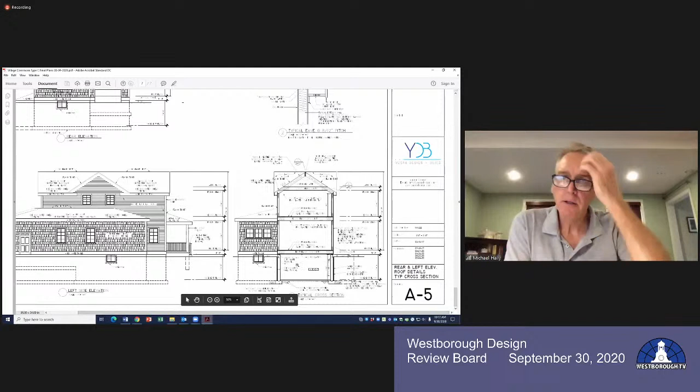Okay, we got to get that newel post on the drawing. Can you send a revised drawing ASAP? Yes. Okay, all right. I don't see the difference in what you just emailed me and what I have up on the screen, but... No, this one here, see those basement windows? Yeah, they're very large. Go back to the one that I just sent you. That was the one that was sent most recently. All right.

So this has got a 9/8 date on it. I don't know, take a look. Got it. Go down a little ways. Okay, yeah, what's the date on it? All right, so in the interest of time, let's approve A and B. We'll make the motion to approve A and B. I thought you're doing C also. Well, okay, can you get a drawing with the second newel post? Yes. I will, you'll have it.

Okay, and you'll have today's date on it, 9/30/2020, correct. Okay, Kristen, are you able for us to vote on this, or do you need more time? It's okay, you can go ahead. Okay, so we made that motion, and the plan's approved as submitted. There'll be a new C plan submitted today, 9/30/2020, to add the new newel post, the second newel post, and second handrail to the patio. Do I have a second?

Second. All right, we'll vote. Hazel, in favor? Yes. Cindy? Yes. Myself, yes. Thank you. All right.